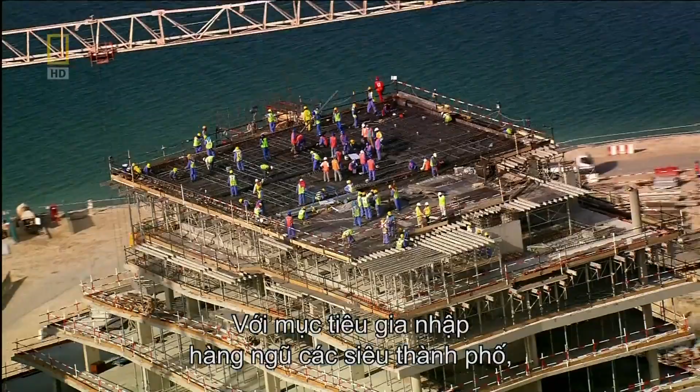Abu Dhabi, the richest city on the planet. It wants to join the City Super League and is undertaking an incredible transformation, building this extraordinary skyscraper, Aldar HQ. Nothing like it has ever been attempted. It'll be a race against the clock. Will this megastructure push even Abu Dhabi to the limit?

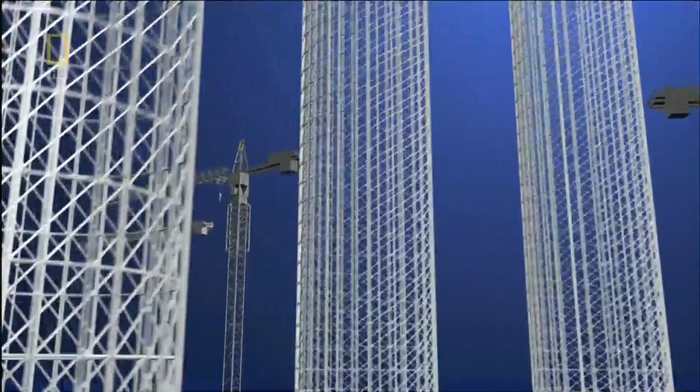Abu Dhabi is in the midst of a construction boom. It's the largest of 7 sheikhdoms known as the United Arab Emirates. Its capital, also called Abu Dhabi, is the richest city on earth. Its ruler, Sheikh Khalifa, has a cool $875 billion in the bank and an audacious spending strategy to match. He wants to transform the skyline and compete with the international elite of London, New York, and Hong Kong.

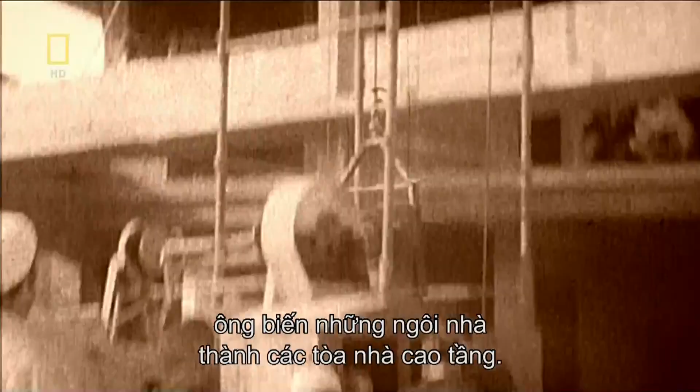But this is not the first time the Emirate has stood at the crossroads. Just decades ago, Abu Dhabi was a desert backwater, until the discovery of oil in 1958 brought unimaginable riches to its ruler, Sheikh Zayed. As the petrodollars flowed in, he converted the shell houses into high-rise, and the traditional way of life was swept away.

Today, Abu Dhabi is a thriving metropolis, sitting atop the world's 5th largest oil reserve. But black gold alone cannot put this city in the Super League. To do that, Sheikh Khalifa must lure big business and tourist dollars. Abu Dhabi must expand to thrive.

To put Abu Dhabi on the world map, fledgling property developers Aldar plan a whole new micro-city, Al Raha Beach. It's an ambitious proposal. At 11 kilometers long and almost a kilometer wide, this city on the sea will be the biggest project ever attempted in Abu Dhabi's history. Mohammed Al Mubarak is in charge of delivering this audacious development. The vision of their highnesses and the vision of Aldar was to create this almost mini city where people can live, study, play, and work in one destination.

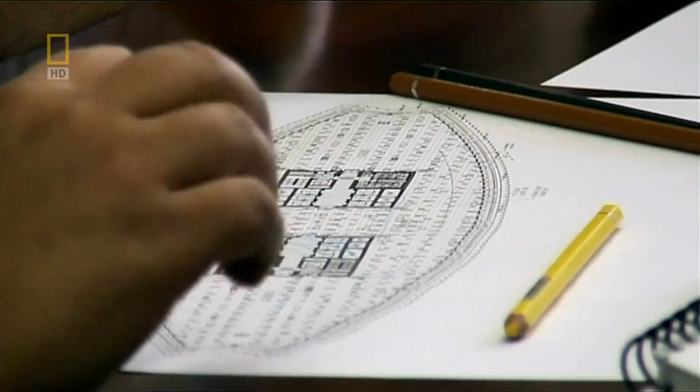Al Mubarak must attract investors if Al Raha Beach is to succeed. So to launch the project, he commissions a signature skyscraper. Creating an iconic structure on Al Raha Beach was of vast importance in basically putting Al Raha Beach on the world map. Al Mubarak sets Lebanese architect Marwan Zgheib the task of designing an icon that raises the stakes even higher. The building will become Aldar's headquarters in the heart of their colossal development.

But creating something new in a land where the iconic is the everyday won't be easy. Neighboring Emirate Dubai has taken center stage with a number of headline-hitting projects. The world's tallest skyscraper, Burj Khalifa, the Palm, and the World, and the emblematic Burj Al Arab. To stand out from the crowd, Zgheib knows he must redefine the extraordinary. Simple can be powerful sometimes, and especially in architecture. You can see it since the pyramids of Egypt. Most of the iconic buildings are very simple buildings.

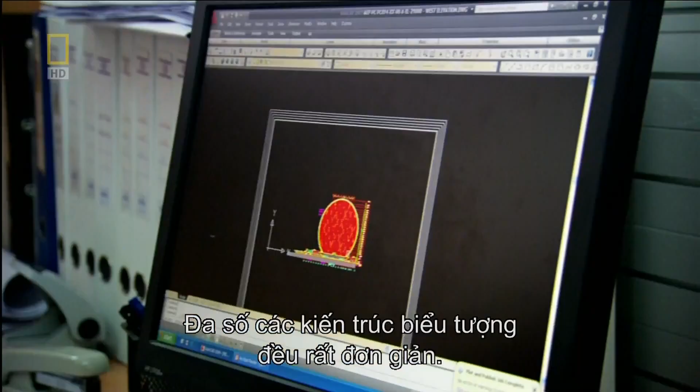But it isn't until Zgheib is relaxing on a plane that he has a brainwave. But I couldn't sleep, so it was a moment of relaxation, you know. And then the idea came simply. So I took a pen and I drew it on a sketchbook. The design is simple but daring: a round skyscraper taller than the Statue of Liberty, with a curved glass skin covering the area of 4 football fields. To be honest with you, the moment I imagined it, I knew it was a winning concept. I knew it was something different.

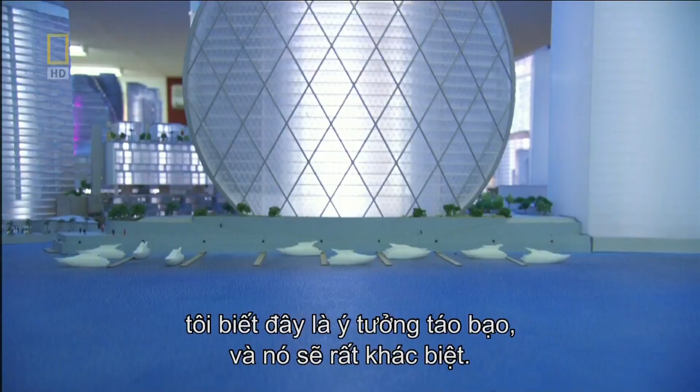In fact, the design is so unusual, Al Mubarak initially doesn't know how to react. And when I first looked at the MZ design, I was a bit confused in the beginning, to be honest with you. I felt like I was looking at a comic. I felt that this was a flying saucer and basically it landed on Al Raha Beach. And I just kept on staring at it for like another 15 minutes. And after 15 minutes, I just fell in love with it.

Zgheib's design is inspired by nature. 2 giant circular curved walls of glass mirror an open clamshell. Architecture is nothing but imitation of nature. At the beginning, the idea was so geometrical, very pure. It's like a seashell. The seashell has deep meaning for Abu Dhabi with its seafaring heritage. But a circular design poses a problem. Just like a coin that stands on its edge, it risks being unstable. The circle must be balanced.

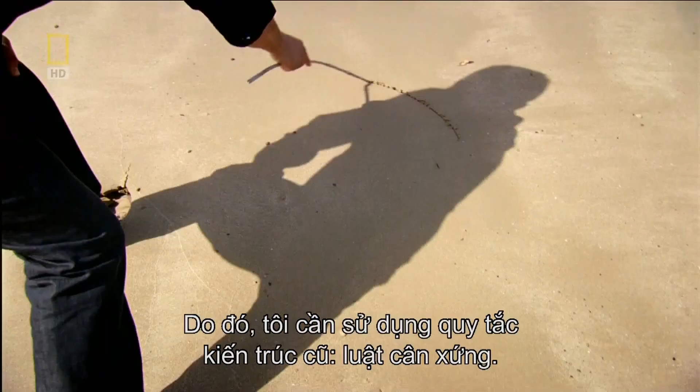So Zgheib turns to some very old-school geometry. The real challenge of the circular facade was to find the 2 points where the building should pose on the ground. And for that, I had to go back to one of the oldest rules in architecture, proportion. When you have a circle, you can divide it into a pentagram.

And that pentagram, in fact, is a representation of the cosmic body of the human being. So you can put a man in that pentagram, the man and the universe. So the pentagram will define the 2 points of the circle where the facade will lay on the ground. And this will create the perfect balance.

It was the same thinking that led 16th century philosopher Heinrich Agrippa to draw man as a pentagram inside a circle, and has helped architects to proportion buildings for centuries. But it's one thing to sketch a circular skyscraper and another to bring it to life. There is no precedent. A building like this has never been attempted before. Zgheib must find out if his design can actually be built.

We knew from the first moment that the engineering of that building is not going to be a simple traditional thing. But it's not the skyscraper itself that poses the first major challenge. It's the proposed site. They wanted to show me the site, but all you can see was the sea, nothing but the waters. Unbelievably, the solid ground required for Aldar HQ does not yet exist. The desired location is 700 meters out in the Persian Gulf and 8 meters underwater.

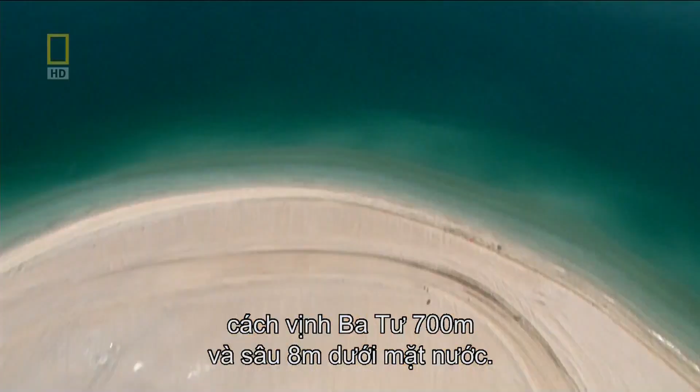New land must be created. Over 3 million cubic meters of sand must be found. Surely a simple task with Abu Dhabi's endless desert dunes. But desert sands are too fine to build with. The land would just slide into the sea. Marine sand is needed. Its larger grains help it stick together, creating the perfect base to build on.

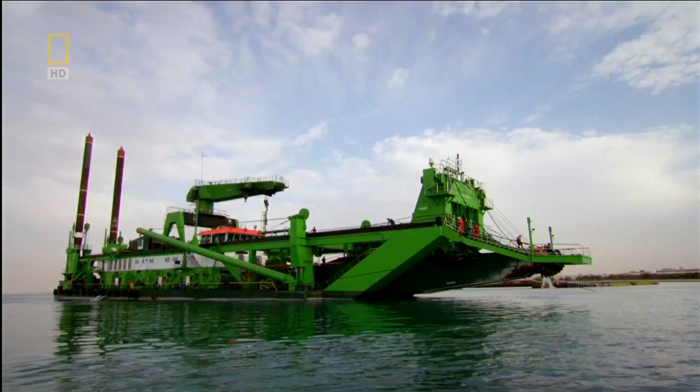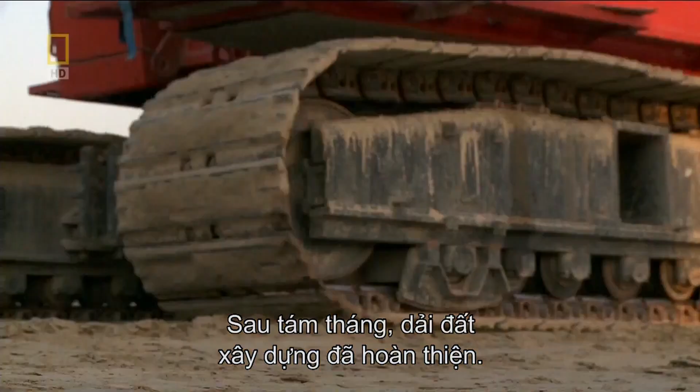These are no ordinary dredgers. It takes an enormous claw layered with 48 reinforced steel teeth to slice through the hardened sand. The sand is pumped through a floating pipe to the construction site. Here, excavators toil 24 hours a day to flatten the virgin ground. After 8 months, the land for Aldar HQ is fully formed, and with this, the first major problem overcome.

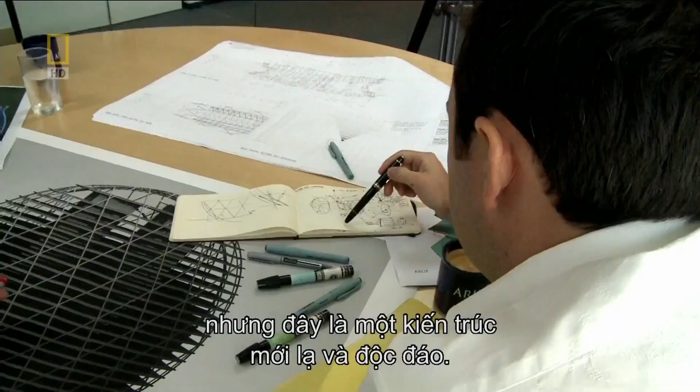Aldar want their skyscraper completed by an astonishing deadline. In just 30 months' time, the eyes of the world will be on Abu Dhabi when it hosts its first Formula One Grand Prix. The racetrack will be on its own designated island, complete with hotels and theme parks. And Aldar are building the lot. The international press and tens of thousands of visitors will descend on the city. It's the ideal opportunity for Aldar to showcase their new HQ. But to stand any chance of meeting this target, the team will have to pull out all the stops.

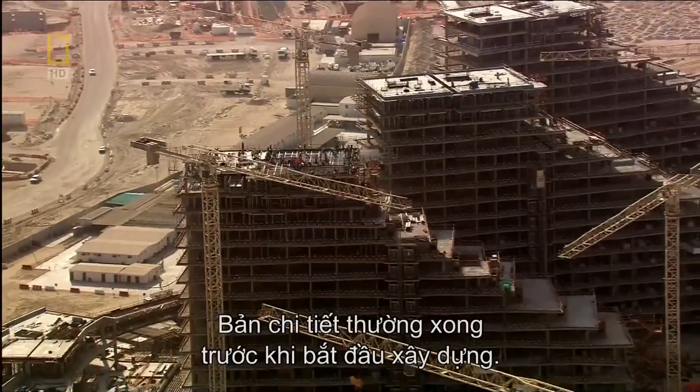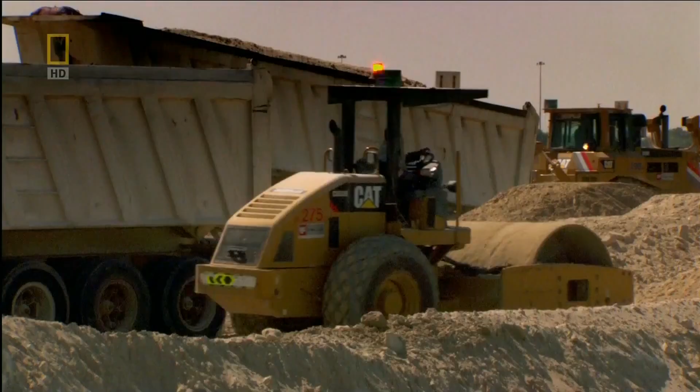Normally, blueprints are complete before construction begins. But Aldar HQ's deadline means this is impossible. Given the programme challenges with this project, the only solution was to overlap the design with the construction. It's the only way the team can design and build a radical skyscraper in just 30 months. With the clock ticking, the ground is prepared for the foundations. They will carry the loads of Aldar HQ into the ground.

But there's a problem. Working on blueprints one step ahead of construction could be risky. The speed at which the construction had to be undertaken meant we had to get the foundations in before we'd fully resolved what goes on above. Even though nothing like Aldar HQ has been built before, the engineers must take a leap of faith and start laying the foundations without a full set of plans. It put tremendous pressure on the team. Problems can't remain problems for long. We don't have the luxury of time to sit around and contemplate what the solutions might be.

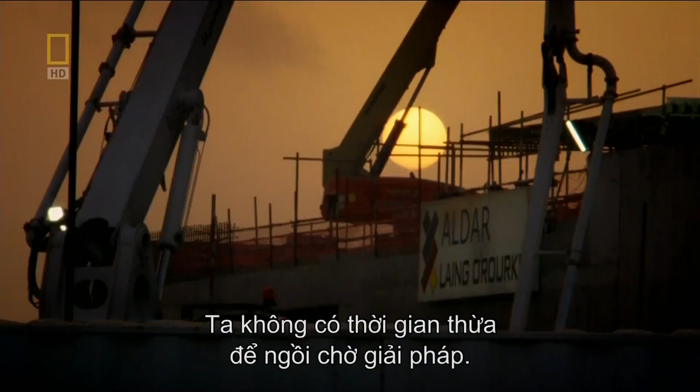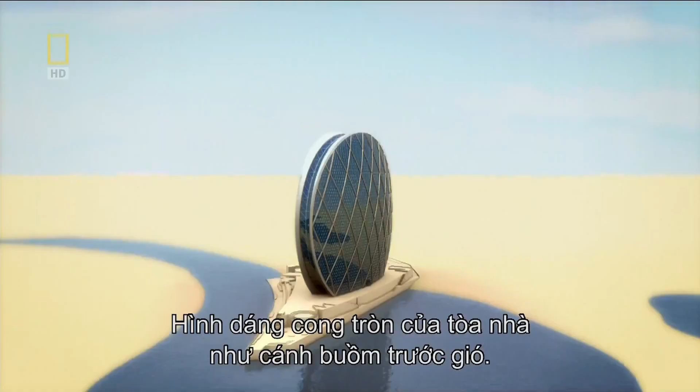Just 2 months after design has started on Abu Dhabi's round skyscraper, the construction team arrive on site to begin foundation works. For construction manager Miles O'Sullivan, the schedule is a shock. With the design not complete and being told you're going to pile in 2 months, almost crazy. But it's not just the first deadline O'Sullivan has to worry about. Aldar HQ's round curved shape presents an enormous sail-like area when wind strikes. Wind tunnel tests must be done to prove the foundations can take the strain. But the results won't be back until work has already started.

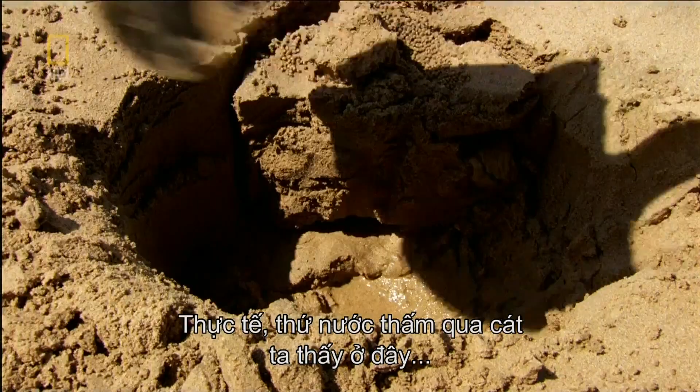Abu Dhabi is regularly hit by high-pressure winds that sweep in from the Persian Gulf. But building Aldar HQ so close to the sea will put the foundations under another kind of pressure. Digging for Aldar HQ is very similar to digging here in the sand. What you get as you dig down is you'll get to see the groundwater starting to surge through the sand. And in fact, it's that groundwater that we can see start coming through the sand here that's creating the pressure and obviously creating the issues for us when we do the construction.

The upward pressure of the water and the loose sand pose a problem for foundation construction. Before excavation can begin, the team must build a solid barrier called a diaphragm wall or D-wall. It's a concrete barricade formed of interlocking panels which socket into the bedrock and reach 16 meters below the surface. The D-wall holds back the loose sand and the surging seawater, ensuring the ground inside the barrier can be removed.

These areas here, what are these? Sumps? The D-wall must be built before the foundations can be laid. But with the blueprint above ground a work in progress, the team can only hope that over-engineering the foundations will make them strong enough.

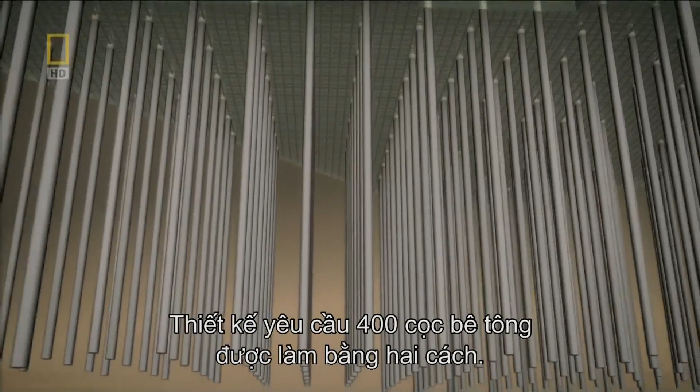The design calls for about 400 concrete piles that work in two ways. Half of the piles rely on friction with the ground to secure the structure to the rock and sand below, whilst the remaining piles drive deeper into the rock to dissipate the building's immense loads into the ground. On site, D-wall construction begins. It's the same process ongoing at this Abu Dhabi construction site.

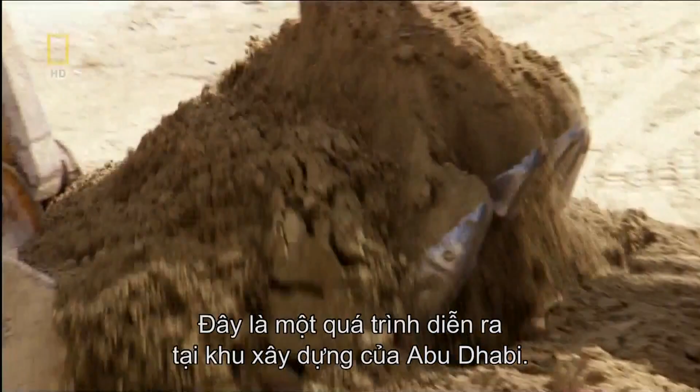Until recently, Al Raha Beach was just a vision for Aldar's Mohammed Al Mubarak, but the dream is slowly emerging from the sea. Seeing that land come up, seeing the amount of work and the amount of staff we had on the ground to make sure that was going to be done, that was like watching Rome being built.

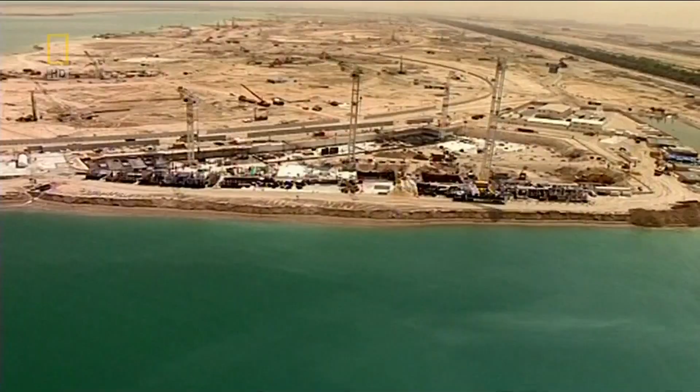The D-wall and concrete piles create a firm foundation upon which to build Aldar HQ. But the force of the sea pushing up through the sand still poses a threat to the skyscraper. A great way of demonstrating the problems we faced at Aldar HQ with the groundwater is in imagining that this bottle here is Aldar HQ. And as I push the bottle down, you'll see forces are exerted on my hand. And in fact, that's the groundwater trying to push the building out, trying to push Aldar HQ out of the building site.

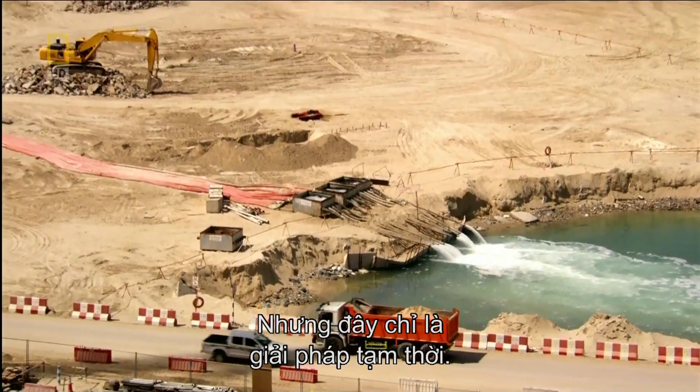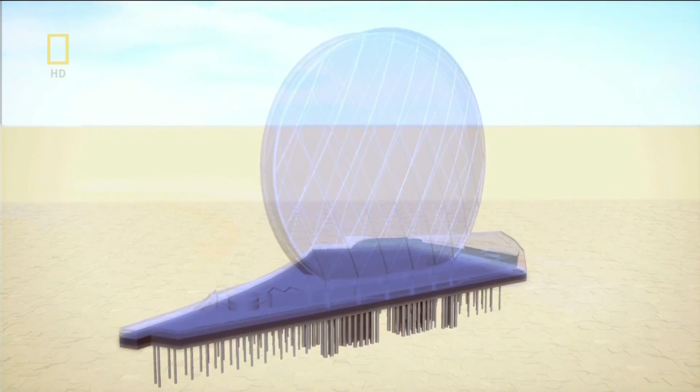To keep the site dry during construction, water is sucked out of the sand and pumped out to sea. But that's only a short-term solution. To protect this skyscraper in the long term, the team need an extra defense. It's a giant slab of concrete called a raft. It creates a barrier against surging water, stops the piles from punching up through the building, and acts like a snowshoe to evenly distribute Aldar HQ's 59,000-ton weight into the ground.

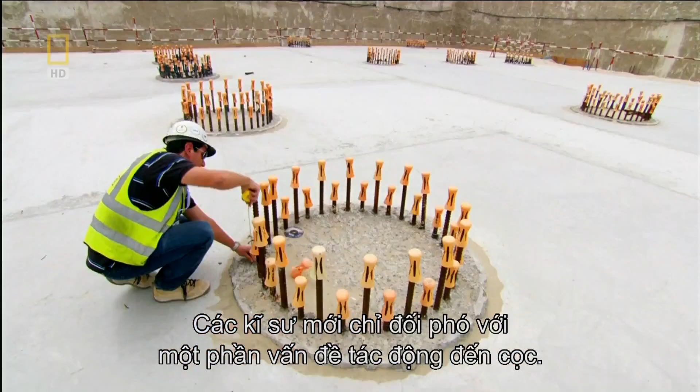Raft construction for Aldar HQ is 12,000 cubic metres of concrete, which is a 30,000-ton structure. It's a huge element. With 2,000 truckloads of concrete to pour, it's a job that continues into the night. But engineers are just getting to grips with the severe forces that will affect the piles. The unique shape of the skyscraper will capture wind like the sail of a yacht. There are no guarantees the foundations will be strong enough to cope with the loads.

The advanced construction works had to commence so quickly that we didn't have time to do the wind tunnel test. It was important that we did one, primarily because this is a unique shaped building. Gibbons calls upon wind engineer Roy Denoon in Colorado, USA. He puts a scale model of the HQ through its paces in his high-tech wind tunnel.

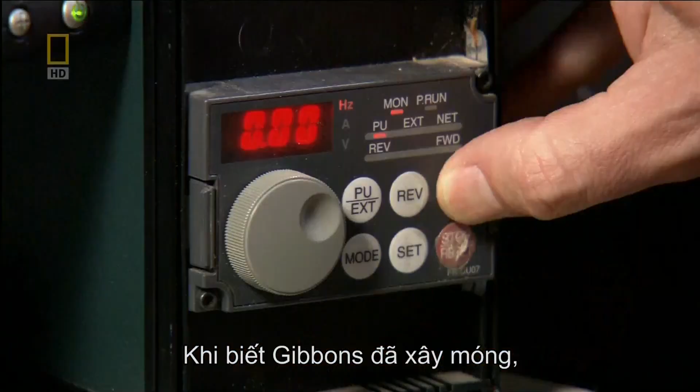Right at the start, Craig Gibbons actually called me and said, "We've got something really unusual coming up. Can you take a look at it and give us your first best guess of what the wind loads might be? Give us some guidance on how to get to some loads for the foundations, because this is running on such a fast-track schedule." Knowing that Gibbons is already building the foundations, Danoon wastes no time in firing up the fans. If the tests reveal the wind loads are higher than predicted, the foundations already in the ground may have to be redesigned. To be putting in the foundations before we could finish the wind tunnel testing, that always gives us a little bit of cause for concern.

Danoon is right to be worried. He knows how high-altitude wind impacts on very tall rectangular skyscrapers. But Aldar HQ's lower height means another type of wind is the threat. When we look at the really extreme wind speeds in the Middle East and in this region, we find that the highest, what we call gust wind speeds, the short events, are caused by thunderstorms. Abu Dhabi may appear sun-soaked, but during the spring, the intense sun heats the moist air, causing spectacular thunderstorms. Wind speeds can escalate up to 137 kilometers per hour. The key issue with thunderstorms in this region is that they give the absolute highest gust wind speeds.

Now, for the very, very tall buildings, that's not too critical because they occur down low. For Aldar HQ, they were really critical. Thunderstorm winds are strongest between 50 and 150 meters above ground. Aldar HQ is right in the danger zone.

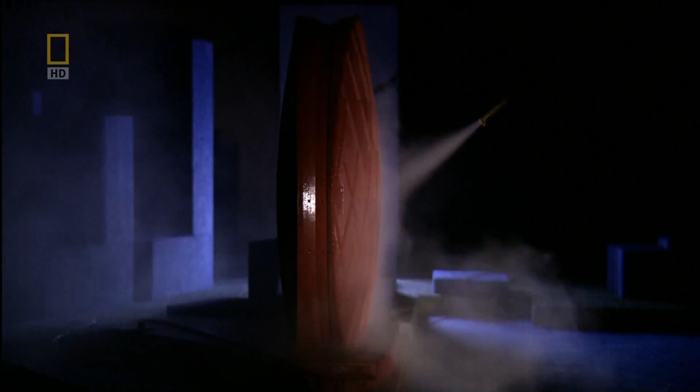In advance of getting the wind tunnel tests, we'd speak a lot with the wind tunnel engineer, Roy Denoon, and Roy would wind me up about the kind of loads he was getting, etc. And knowing that the piles were going in as we spoke. Wind hitting Aldar HQ's sail-shaped facade puts the building's narrow base under pressure. The wind wants to twist the structure. The foundations must be strong enough to resist these forces.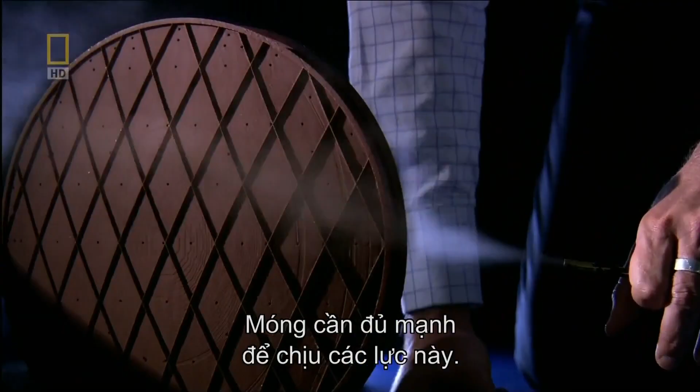A little bit more smoke there, Doug. And if you could just crank the speed up in the tunnel just a touch. A little bit more. Danoon analyzes the wind tunnel data. Fortunately for Gibbons, it's Danoon's jokes that have no foundation.

When I got the results back from the wind tunnel test, and they were within an absolute whisker of my early predictions, I was just delighted by that. I couldn't wait to get on the phone. They were pretty relieved, I think, because I think they'd been sweating on it a bit. It was a great relief to know that Roy was just winding me up, and that in actual fact the wind loads were very much in line with what our expectations were. The results of the wind tunnel test are great news, but the relief is short-lived.

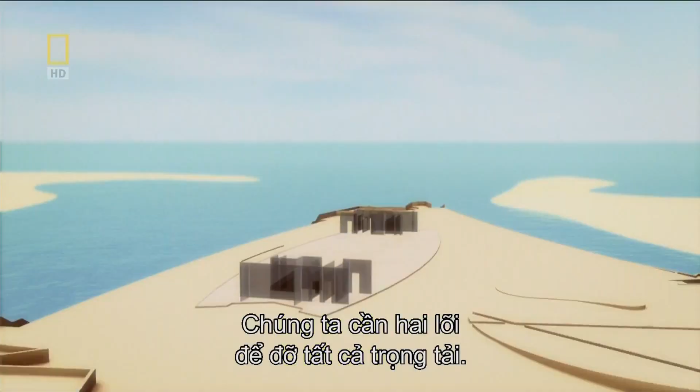Now the structure needs a super strong backbone or core. But again, conventional building won't fly with this design. For Aldar HQ, one core wasn't enough. We needed two cores, in fact, to take all the loads down into the structure. Aldar HQ needs two concrete cores for extra stability. The twin spines rise a full 125 meters from the concrete slab to level 23. Reinforced with 6,500 tons of steel, these cores will transfer the loads into the piles. But to channel these forces safely, the concrete must be cast without any flaws.

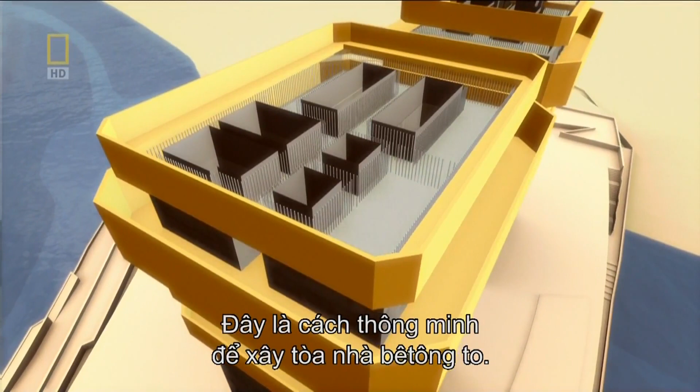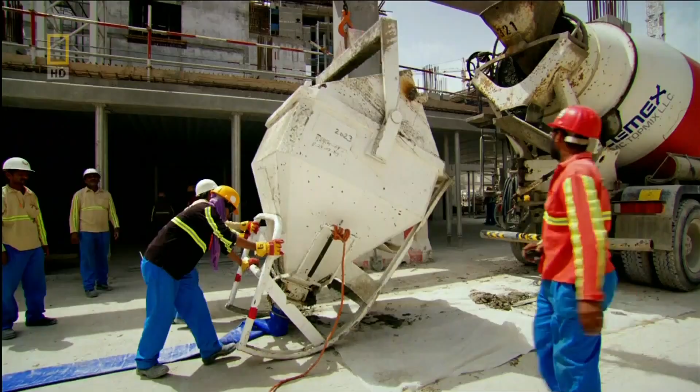They need a way to build the cores as two single pieces of concrete. The answer? To slip form. It's a clever way to build big concrete towers. Liquid concrete is poured into a giant mold, which forms the shape of the structure. The mold slowly climbs up the core as it's cast, forming a single concrete tower without any joins. Seamless concrete will ensure the HQ's cores are strong. But these 125-meter backbones must be built in only 6 months.

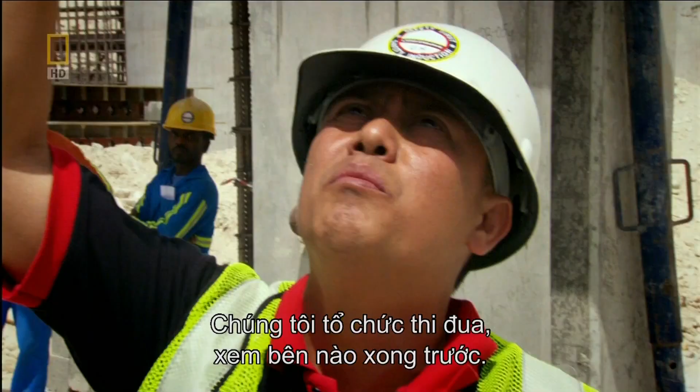It's the same process ongoing at this Abu Dhabi construction site, led by the Aldar HQ team. We are calculating how much per hour we need to climb, and then how much concrete we need to place in every hour. Slip form is fast, but on this schedule it's not fast enough. O'Sullivan has a trick up his sleeve to speed up construction. We set a challenge to both cores, who could get up there first. More, get up. The teams battle to reach each level before the other.

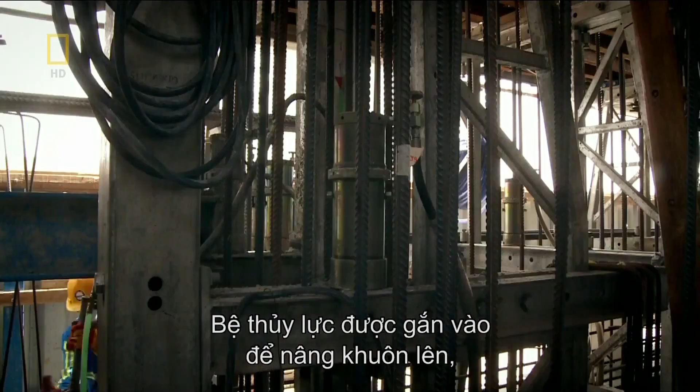The cores grow meter by meter under a constant cycle. The concrete is released and poured around the steel reinforcement. Hydraulics anchored to the structure raise the mold or shutter so that the next layer of concrete can be poured. And manpower is a key focus because slip forms are very labour intensive. You need to make sure that the guys are on deck, they're there at the right time, they're doing the right works. 4 months into core construction, the two teams are neck and neck in the race to the top.

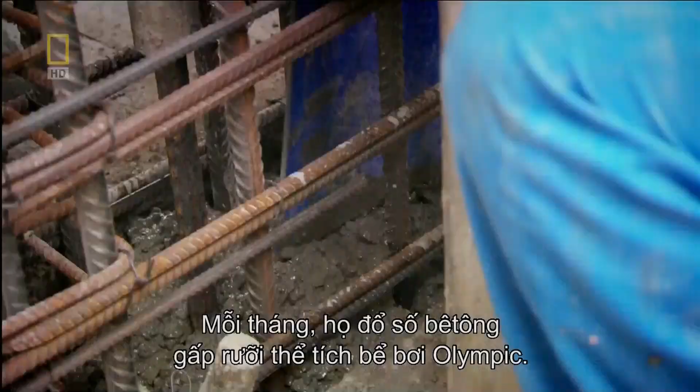Core 1's team leader keeps a close eye on Core 2's height. It's been my benchmark, so if I'm doing better, I'll be ahead of them. So a lot of pressures are there. My boss is telling me, do this, go up, go up, go up. But it's good, the pressure is good. Core 2's leader also feels the strain. I'm working 24 hours today. I try to finish earlier than the other core. Every month, the builders pour enough concrete to fill 1.5 Olympic swimming pools.

But the teams aren't home and dry yet. It's still a challenge to finish. Cores are renowned for going up quickly and sometimes having problems, so there's a lot of coordination effort that goes in to make sure that they do go up on time. We had structural steel elements to cast in. We had crane connections to get right. After just 6 months, the 2 cores are approaching the top. Core 2 is only a metre or so behind, but Core 1 push ahead to victory. Core 1 won the race. It's really good to know that we're on top.

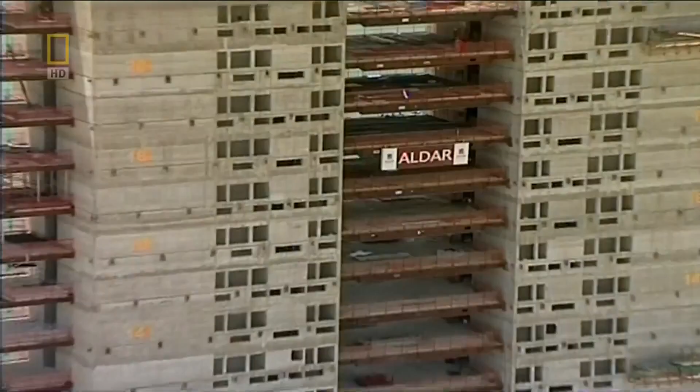For O'Sullivan, the contest to build the cores in record time has paid off. A lot of planning goes into the cores. To see it come off, a fantastic feeling. But it's only a stepping stone, the core construction. There's a lot more to go on. The team have so far overcome the obstacles to bring Aldar HQ to life. But now they must face their most complex challenge to date. 1 year in, and Abu Dhabi's radical skyscraper is beginning to take shape. But with only 19 months to the deadline, the engineers must crack how to build Aldar HQ's vast external shell.

The design demands a heavyweight shell to support its wide girth and survive huge wind loads. But the architect stipulates open office space, floor-to-ceiling windows, and panoramic views of the Persian Gulf. In the United Arab Emirates, the shells of rectangular skyscrapers are built with concrete.

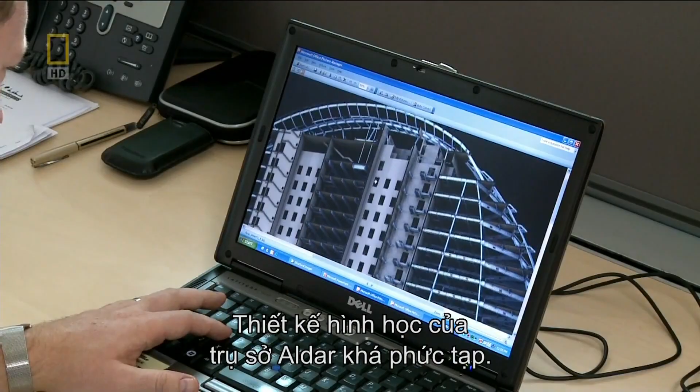But the geometry of Aldar HQ's shell is so complex, it must be built with the precision of a Swiss watch to fit together. On this scale, achieving millimetre accuracy with concrete is practically impossible. We knew at the outset a wholly concrete building was never going to work in this instance. The engineers need another solution.

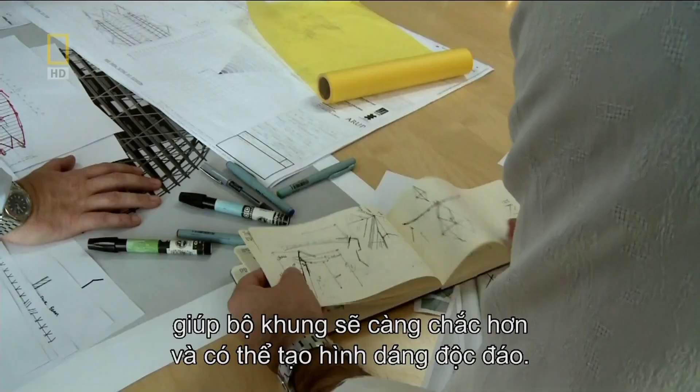The answer? A specialized steel exoskeleton called a diagrid. It's a muscular but slender steel frame that will form the HQ's unique shape and will channel forces through its high-strength beams and joints into the cores. Steel is very strong as a single element, but meshing them all together gives us this added strength and also allows us to make these rather unusual shapes.

The steel exoskeleton should make the architect's vision possible, but it'll be a first for the United Arab Emirates. Constructing a skyscraper like this will be a step into the unknown. The geometry of the building presented a significant challenge to us, but the other challenge was that a diagrid building, or buildings using this diagrid system, had never been built before in Abu Dhabi and the UAE.

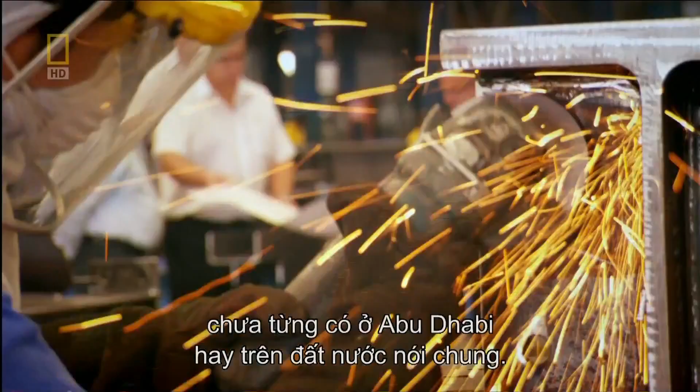Let's have a look at it if you don't mind. It'll take expert steel fabricators to pull this job off. When we first saw the design, it was something that we knew we had to put our most experienced guys on. The structure's very, very complex.

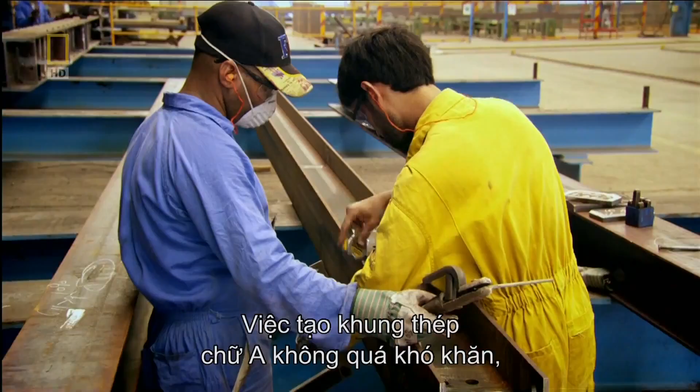The army of fabricators work in shifts around the clock to cut and weld 2,500 tons of steel. The factory is building a series of A-shaped steel sections, weighing up to 30 tons each. They will connect together to form the structure's signature curves. But if manufacturing these giant A-frames is not a big enough job, lifting them into position on site will be a major challenge.

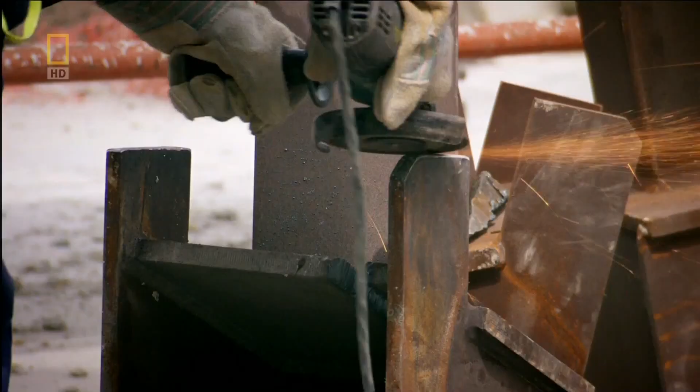Great to see the steel arrive for the main diagrids, the main columns to the structure. Huge sections. The thought of actually starting the steelwork some 18 months after we started the job, fantastic. But excitement of the first A-frame delivery is soon replaced with trepidation. Lifting these monsters will be a precision job, and tensions run high.

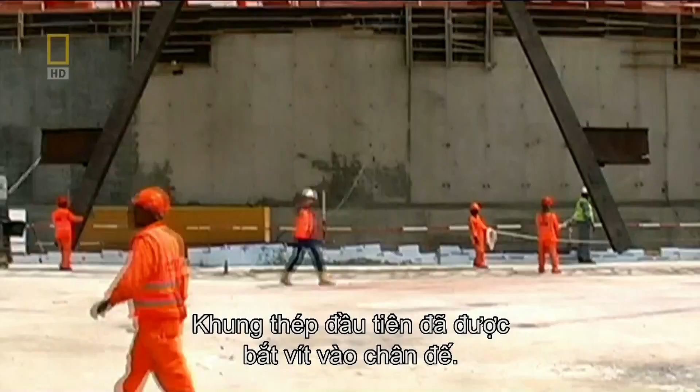When we rigged the first A-frame up, you've got to put all the chains on it. It would take maybe an hour to rig it up, and everybody's then thinking, I hope this is going to work. Everyone is on tenterhooks. Now is the moment of truth. The A-frame is lifted off the ground. There was a big ah from the crowd when it went in. The first exoskeleton section is finally bolted to the base plate.

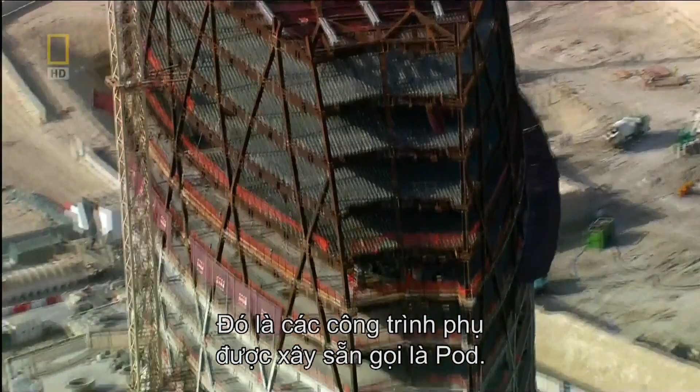The structure needs an alarming number of restrooms, 85 in total. This is no weekend DIY job. It'd take an army of plumbers and time the schedule cannot spare. So to fast-track the task, the team innovate again with prefabricated washroom modules or pods. A pod is a factory-made restroom, complete with lavatories, basins and mirrors, ready to plug into the building.

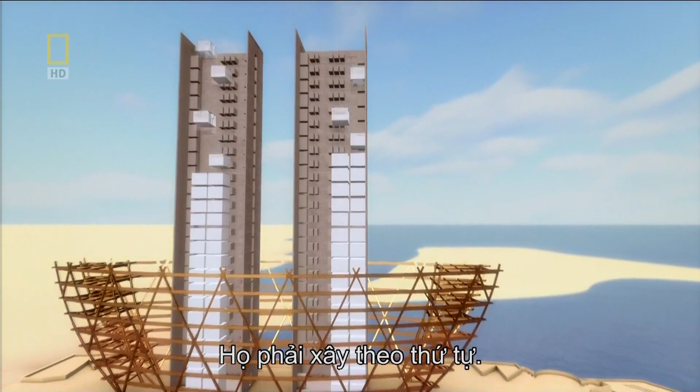The team plan to lift these 12-ton pods by crane and lower them into the cores like a giant game of Tetris. Construction is a finely tuned sequence. The pods have to be in before the exoskeleton blocks access to the cores. Aldar must approve the design fast. But there's a problem.

We produced a lot of visuals and graphics which we had signed off. Then we actually built the pod. We went to look at it at the factory and a lot of people thought that's it. But Aldar unexpectedly rejects the pod design. It's just too ordinary for such a futuristic skyscraper.

It will take months to remodel, and the exoskeleton can't wait. The whole plan could go down the pan. The only option is to leave out 2 roof sections and drop in the pods later, but this has its own dangers.

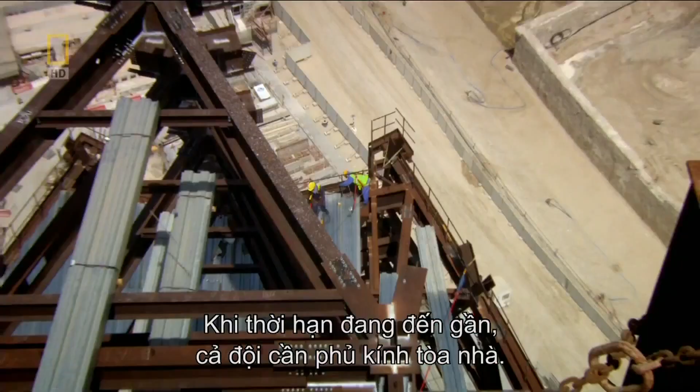With zero hour looming, the team must now wrap the building's skeleton with a glass skin. And no one has ever built a glass facade like it. The geometry of Aldar HQ is highly complex. Two giant bowed facades cover an area the size of 52 basketball courts. A third narrow surface joins the round facades like a zipper, arcing an extreme 290 degrees from one side to the other.

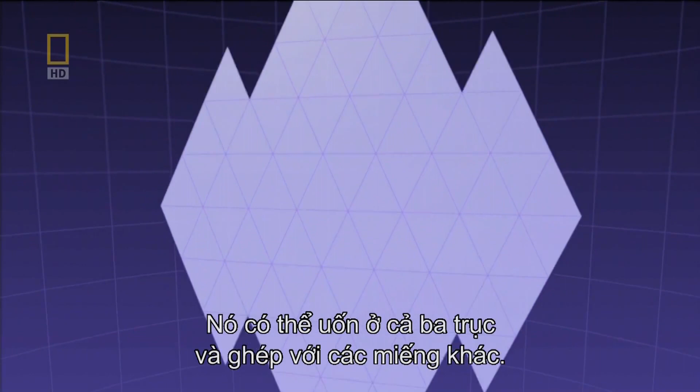But curved glass like this doesn't exist. The engineers need another plan. The secret to covering a curved surface with flat glass is its shape. Square glass isn't an option. Squares can only bend in one direction at a time without distorting. Aldar HQ needs triangles. They can pivot on 3 axes and seamlessly join with their neighbors. To form these complex curves, it'll take 25,000 individual panes.

But before glass production can begin, the team must know what wind pressures it will face. It's back to wind engineer Roy Denoon, who must test the design in his wind tunnel. When we first saw the design, we knew there was some potential for some quite high glass design pressures. If you under design a pane of glass, then it will be sucked out the building. The large facades are most likely to cause trouble.

The biggest loads on the overall building are where the wind's coming flat into the wide face, so it's capturing it almost like a sail. The wind comes into the centre and spreads out around the building, and where it separates and splits away from the building around the edges, that's where we see the largest pressures. The pressure is like a big SUV hanging off the outside of each panel.

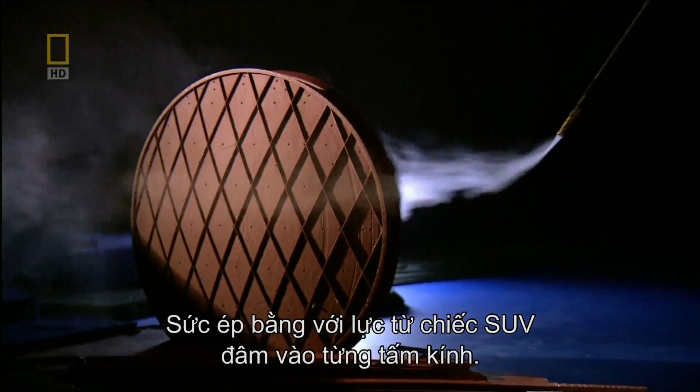But that's not all Denoon's test reveals. The circular shape of Aldar HQ creates another problem. When we initially saw the design, the sharp edges threw up the warning flag that said, look, we can get some pretty large pressures here. Where the wind hits the edge of the narrow strip of glass, it spirals in on itself, creating a vortex.

You see this recirculation of the fluid, separates away, and you get this little bubble on the surface where the wind isn't hitting, and then it comes back in to meet the surface again. That's typically an indication that that's where your highest design loads are occurring for your glass. And that's very, very strong suction force is what that little bubble means. To stop wind sucking glass out of the HQ, each pane must be beefed up with thicker glass and a stronger frame. But that does nothing to limit the scale of the job ahead: installation.

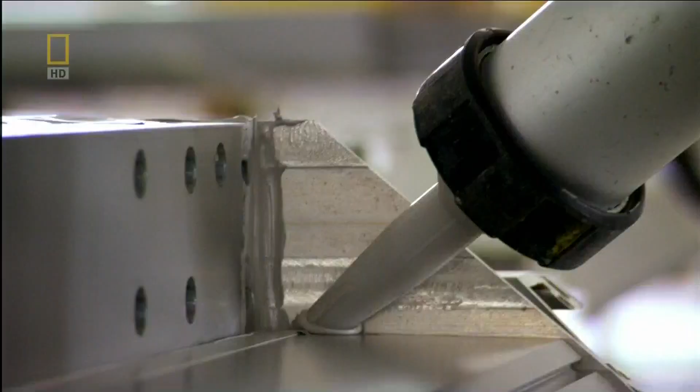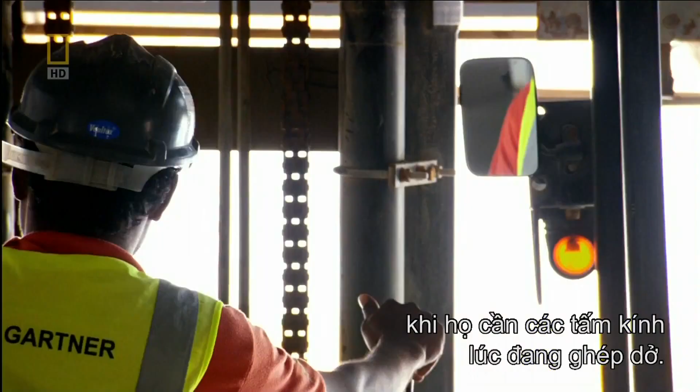You talk about 25,000 pieces of glass. To do that for the building in 10 months, it's a monumental effort. It's a constant battle, making sure that you get the glass to site. But having the glass factory on site is a lifesaver. It made it easier for the site to actually call up on glass. Once they were installing the panels and ran out of glass, we're immediately on the phone: hey, we need more panels over there, so we got them on a truck, and 5-10 minutes later they were on the site. The glass factory sends the panels to the site by truck, and the panels are lifted by crane up to the installation team.

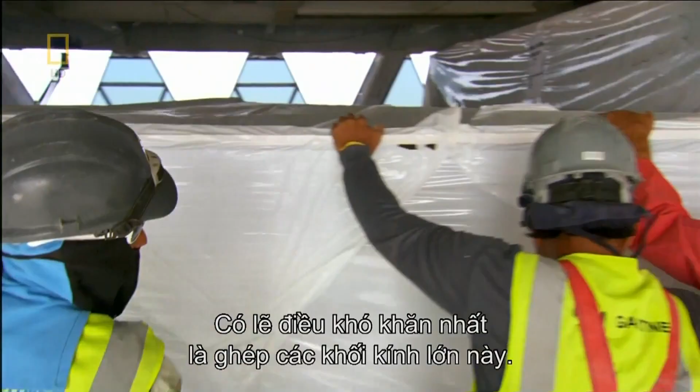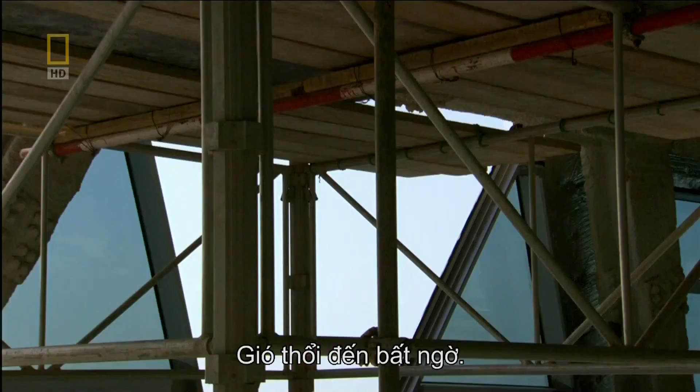The constant pressure was the program. The glass is pulled onto the floor plate, but it takes a team of 8 specialist riggers to install the panels. Probably the hardest thing was the sheer volume that had to be installed. Fixing glass on a curve at this height means the panels have to be swung out from a platform that hangs out of the building. It should be easy, but then this team have Abu Dhabi's wind to contend with. The wind here can just blow in from nowhere. It caused us no end of problems. The glass would start to revolve and spin.

We would get a choice whether to lift it, bring it into the building, put it down, or to put it straight back down on the ground. They were decisions that had to be made on the spot. And you don't want a large panel coming down from 20 stories. Just contemplating that, it doesn't bear thinking about. This glass panel makes it into position in one piece. But the team have another 29 to install every day if they're to meet their targets. We got it up to 30, 32 on average, and I think the best day was over 40.

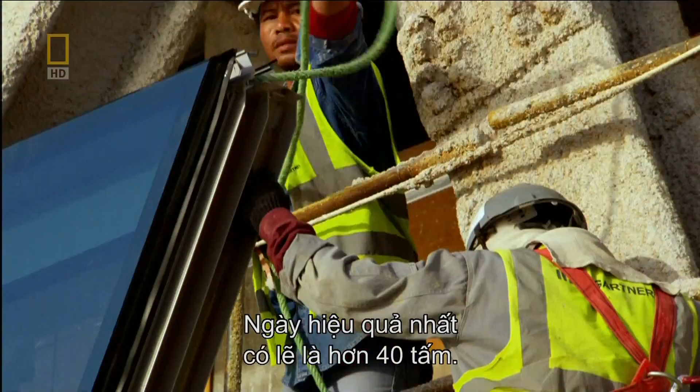But as the line of glass fast approaches the top, the team must install the delayed washroom pods to close up the roof steel. Yeah, so if they did... you do 15 metres, 15 metres in one day. So you're 120 metres, yes. The new design is finally approved, and after 10 months, the 12-ton modules start to turn up on site.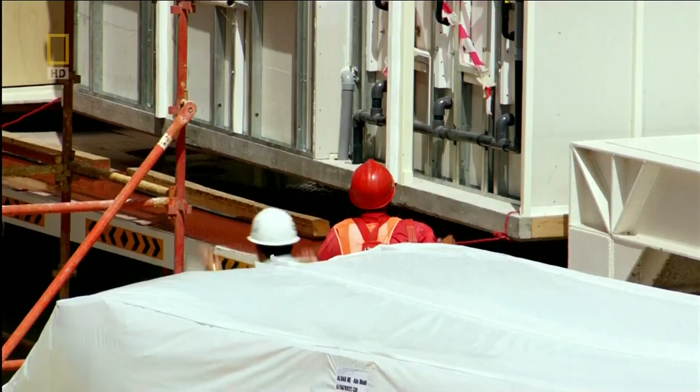The pod drops are quite quick. We hook them up, we take them up the 140 metres to the top of the tower crane. The pod can now be lowered into the core shaft. It's a tight fit with just 75 millimeters of clearance. When I saw the first pods in, it was a relief that that saga was over and we'd actually managed to achieve what the client wants.

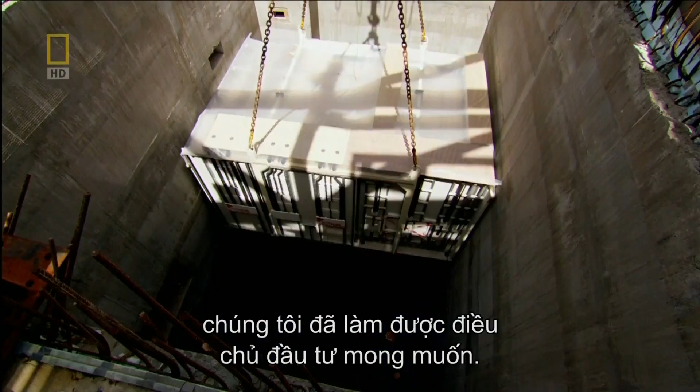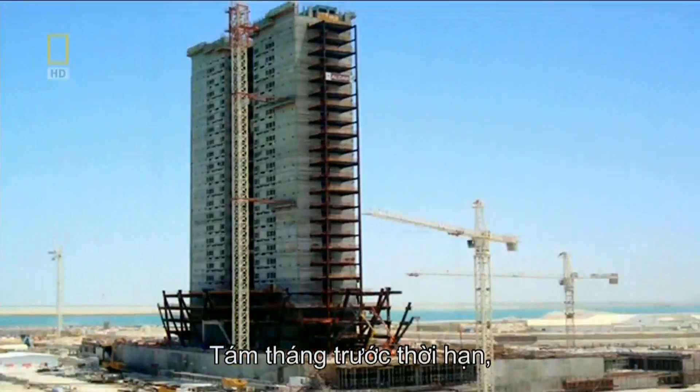The pods are on the move, but the long delay has serious consequences. Finishing the exoskeleton should be a straightforward task. But the incomplete steel roof has sagged out of shape. Eight months from the deadline, and the world's first spherical skyscraper is fast approaching completion. But with the end in sight, construction hits a serious snag. The delay in fitting the washrooms into the cores has forced the team to leave the roof arch open, causing the steel to slouch out of shape.

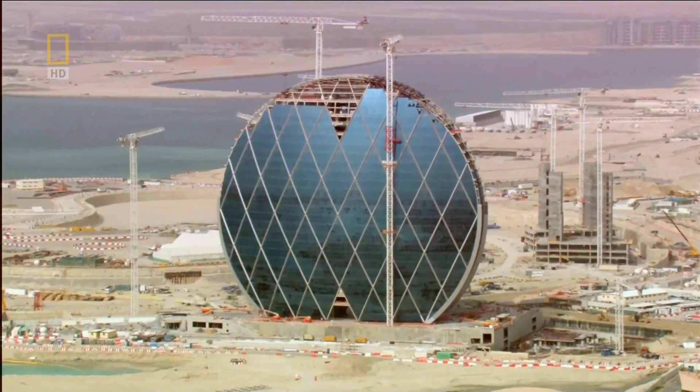The arch of the HQ's lightweight roof is the key to its strength. Its curves evenly distribute the forces down into the foundations. But if any elements of the arch are missing, the forces cannot flow away. The roof will sag under the weight. To discover how serious the slump is, the steel is surveyed. I made a phone call to our site supervisor, Bob, and asked the question of what the actual sag was recorded, expecting it to be around about 50, 60 mil. When we got the figures of 150 millimetres, I was a little bit shocked.

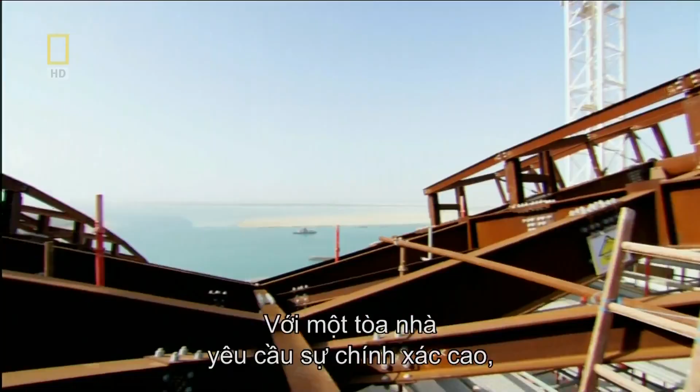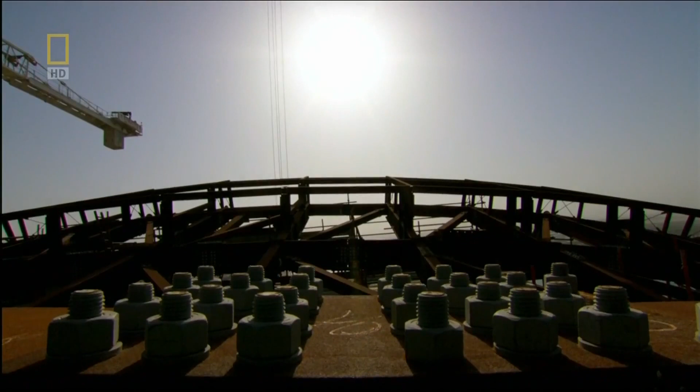With a building that relies on precision engineering, 150 millimetre sag is a huge problem. The roof will not slot together. The brackets to connect the remaining 40 glass panels will be out of alignment. There is no time to redesign. The team have to somehow make the roof steel fit together. The only way is to lift the entire roof into position, and it weighs a staggering 200 tons. Even for experienced steel engineer Bob McPhee, this is a serious undertaking. I hate it when you start waking up thinking about your work. I've never liked to do that.

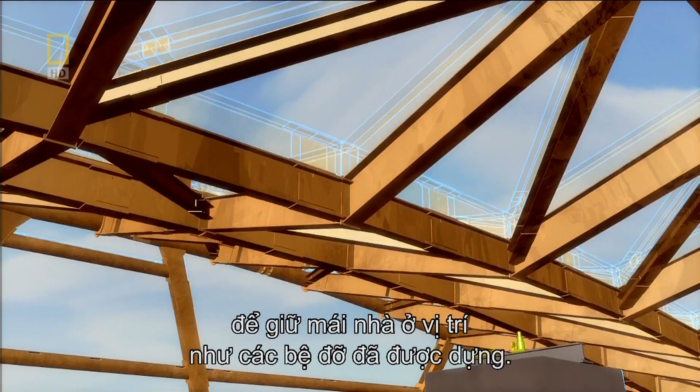To lift the roof arch, 2 hydraulic jacks are positioned on top of a load-bearing wall, carrying 80 tons of weight into the core. 2 more jacks are propped with 16-metre-tall steel columns and channel 40 tons each into the concrete floor of level 23. The props are packed with steel slabs to hold the roof in position as the jacks are raised. The roof was moving firstly a couple of millimetres, then 5, then 10, then gradually into its position, 20, 50, 100, and then into its final position, 150 millimetres.

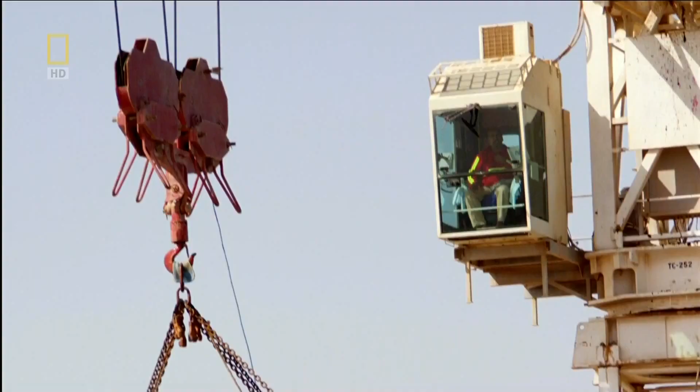The entire roof is raised by a whopping 170 millimetres. The slumped arch is finally in the right position. All that remains is to lift the last steel section. It's a tight fit. With a millimetre to spare, the roof is finally complete.

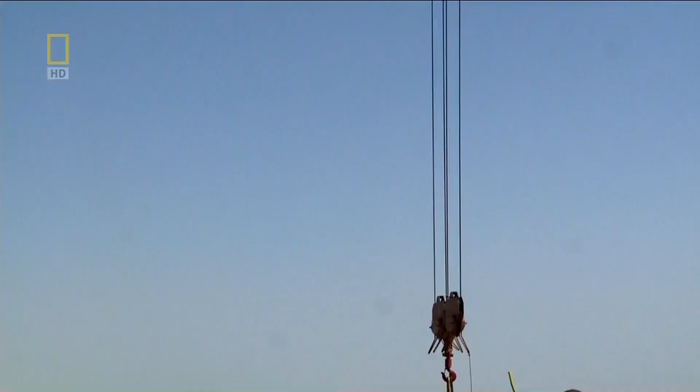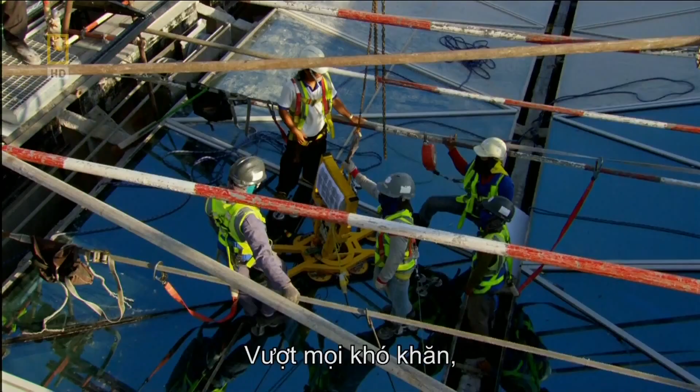With just weeks to spare before Abu Dhabi's first Formula One motor racing spectacle hits town, all of Aldar HQ's 25,000 glass triangles are in position, except one. The glass installation team lower the pane inch by inch. No one wants to be responsible for shattering the last sheet of glass. It's a defining moment for the team. Finally, the last pane slots into place. Ecstatic. Actually see the last bit of glass go in. Amazing feeling. Hopefully the guys here feel the same way, and I'm just overjoyed. Against all the odds, and in just 30 months, the team have fulfilled their brief.

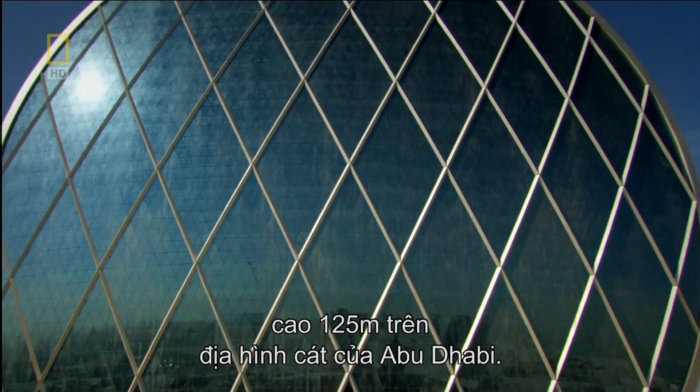An engineering triumph. This is Aldar HQ. This spherical skyscraper, a world first, rises 125 meters above the Abu Dhabi sands. All 25,000 glass panels mirror the surrounding landscape, reflecting the blue skies and the rolling sea of the Persian Gulf. Amazing structure. You don't see any circles in the world being constructed, so to be part of that was fantastic. Mindful of all the issues and challenges and highs and lows in between adds to that feeling of triumph.

Mohammed Al-Mubarak fell in love with an extraordinary idea. But will the building match his high expectations? It is really a work of art. It's a stunning building. To me, it feels like it should be in a museum. The space is unbelievable. It's really a colossal building. When you come up front to it, it's even bigger than you even imagined. And for it to come from paper to that, it's great.

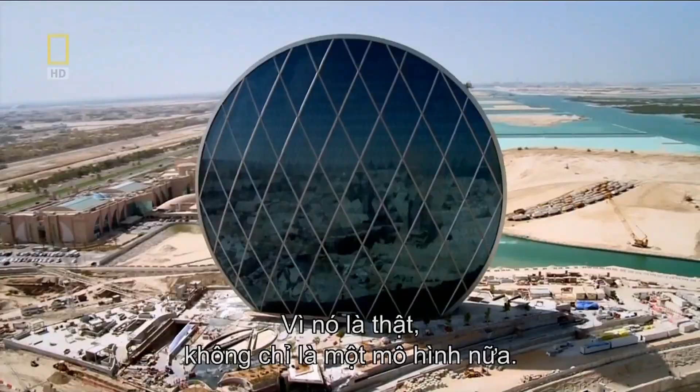Already an icon on the Abu Dhabi skyline, Aldar HQ should lay solid foundations for the future of Al Raha Beach. Architect Marwan Zgheib is delighted to see his concept sketch come to life. The building is more beautiful than the original idea because it's real now. It's no longer a simple concept. It's become reality. Aldar HQ is a structure that rivals not just Dubai's iconic buildings, but can stand proud on the international stage. The HQ building has really put Abu Dhabi on the world map. If you ask me today, we're not yet into the world of Singapore or New York or Paris or London. Will we get there? I absolutely believe we will.